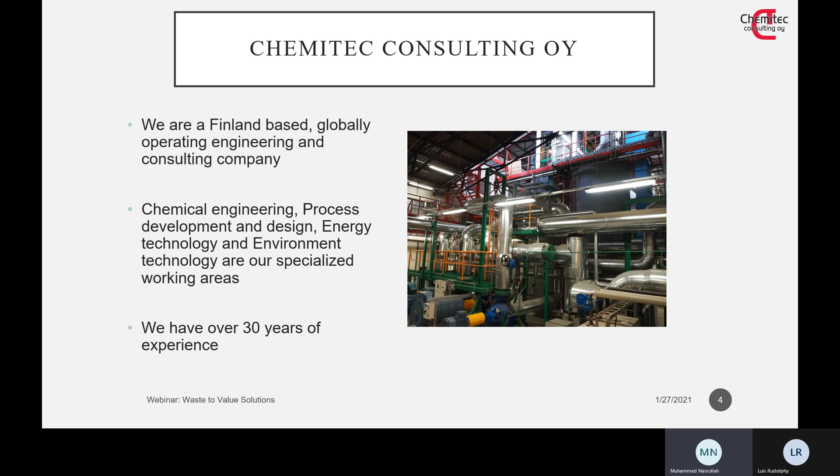We are now more than 30 years old. We have been operating in different parts of the world, and we have conducted quite many projects in Europe, and also we are active in Asia and other parts of the world. Chemitec's head office is in Espoo, Finland. We have conducted a number of projects in chemicals related to chemical engineering, process development and design, and in energy, including waste to energy.

These are waste to value related expertise and services Chemitec has been working on and offering to our customers and clients in different parts of the world: starting from process concept to solution development, technology assessment for best available technology route, project scoping and baseline study, detailed techno-economics, project costing, pre-feasibility study, feasibility study including basic design and pre-engineering. We are also involved in arranging technology for waste to value and waste to energy solutions. We are partners of top waste to energy technology supplying companies in Finland, and we also do project management in this area.

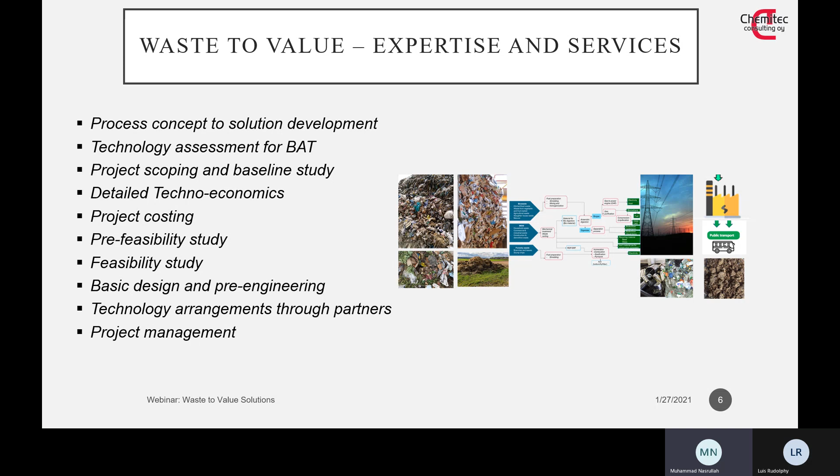Here is a list of projects we have worked on quite recently in waste to value and waste to energy related projects. We prepared a pre-feasibility study delivered to our client in Mymensingh, Bangladesh, for about a 5.5 megawatt electricity production waste to energy plant. Then we also prepared and delivered a pre-feasibility study for a 23 megawatt electricity production waste to energy plant in Colombo, Sri Lanka.

And we have prepared a number of project proposals for different cases in Pakistan, including waste to energy plant proposals in Karachi, Lahore, Islamabad, and Faisalabad. Very recently we have signed an agreement with a client in Bangladesh, and we will start working to deliver a bankable feasibility and pre-engineering study for a 6 megawatt waste to energy plant in Savar, Bangladesh.

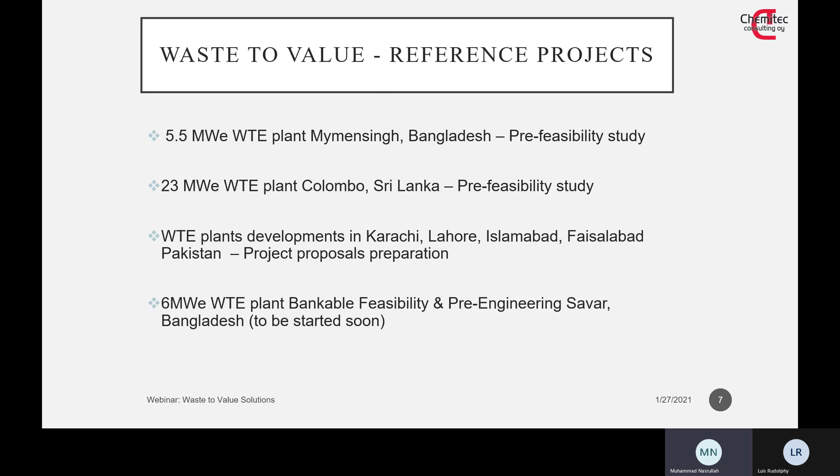Right, so now we come to our main topic, which is about the issue of waste management. As I mentioned earlier, why do we need to worry about waste management? What are those things which are already getting alarming in this sector?

So this study is basically conducted by World Bank Group about a global snapshot of solid waste management to 2050, in which they have presented region-wise the waste generation in the world.

So here if we see the top 3 regions producing more waste than others: first is East Asia and the Pacific, Europe and Central Asia, and South Asia, generating 468 million tons, 392 million tons, and 334 million tons respectively. And then there are other regions, North America, Latin America, and the Caribbean, and so on.

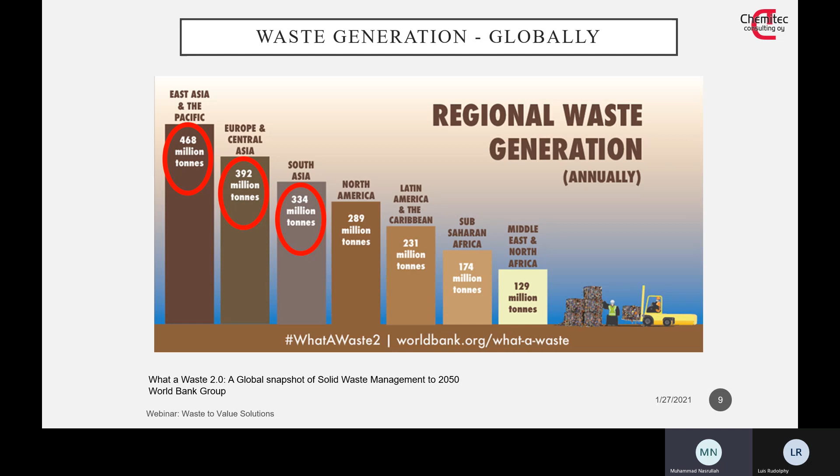Right, so it's important to know how those regions are treating their waste, how they are handling the waste generated there. Looking at South Asia, 75% of the waste generated ends up in open dumps. Those are not even proper landfills or managed landfills, but just open dumps, somewhere outside the city, where waste is transferred and placed in open areas.

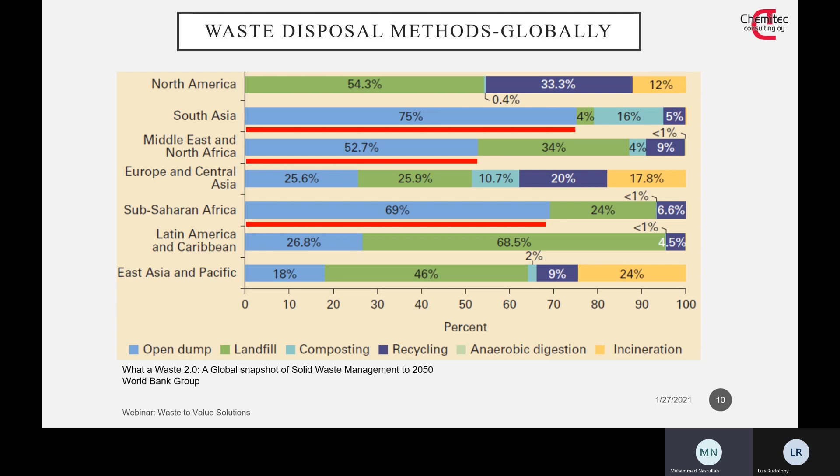Similarly, in Middle East and North Africa, 52.7% of the generated waste ends up in open dumps. And in Sub-Saharan Africa, around 70% of generated waste ends up in open dumps. In those regions, very little waste goes to proper landfills, and even less is utilized for value recovery in terms of composting, recycling, or incineration.

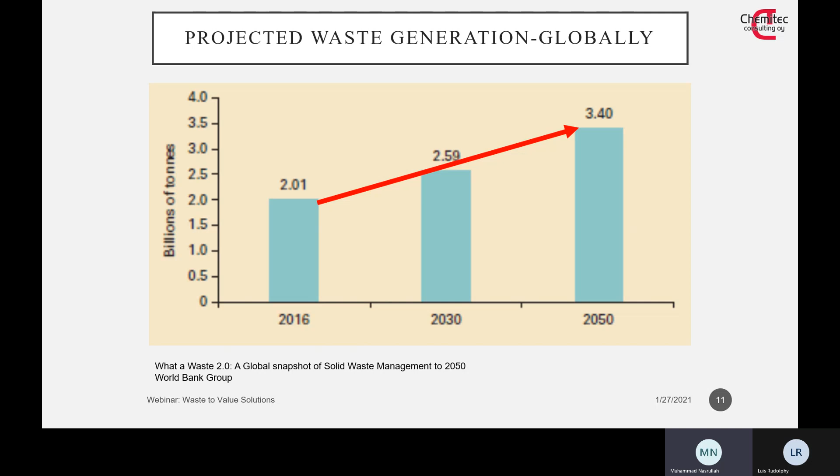This slide shows the generated and projected waste amount in the world. In 2016, it was around 2 billion tons, and it is projected to be 3.4 billion tons by 2050. So the trend is increasing, as countries are developing fast, more urbanization is taking place, and the lifestyle of people is changing, so the amount of waste is also increasing.

Talking about Southeast Asian countries, here are some prominent countries in that region regarding waste to energy and waste to value related sectors. In Vietnam, annual waste generation is a little more than 20 million tons, around 22 million tons. Thailand generates around 25 million tons, and Indonesia is the highest waste generating country in the Southeast Asian region, more than 60 million tons per year.

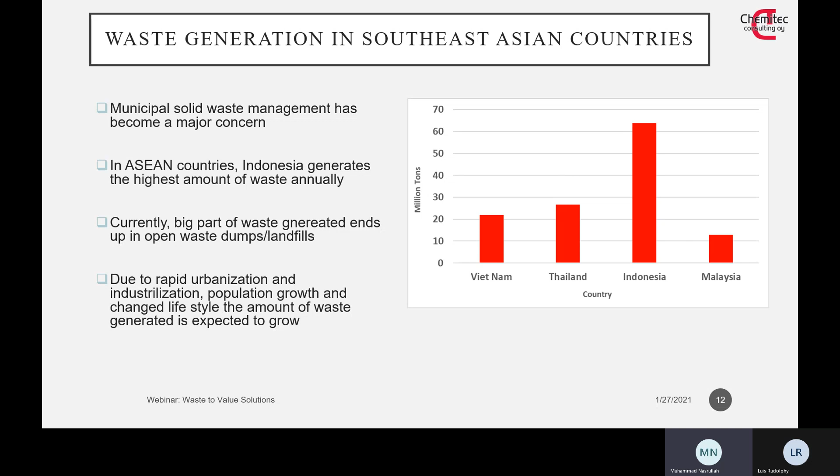So basically, the message here is that there are two main fractions in this waste which contain value and which can be recovered quite significantly. First is the organic waste, food waste, and second is the combustible fraction, including paper, cardboard, plastic, textile, etc.

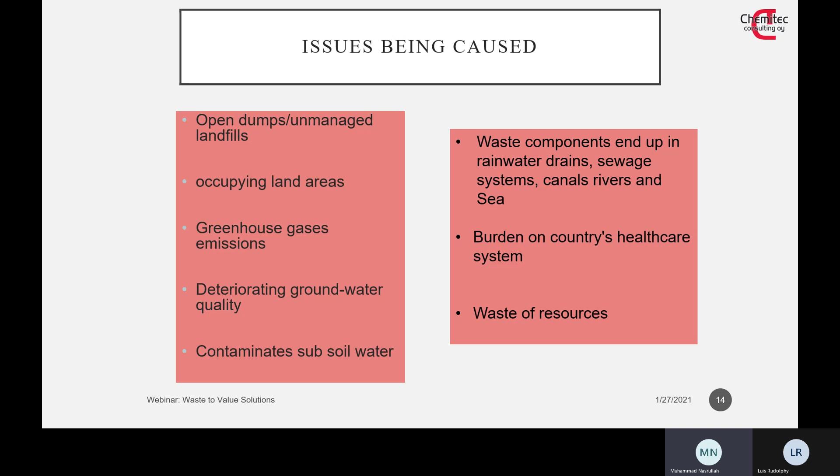Now we will go through waste to value solutions Chemitec has developed and offered to customers in Europe and Asia to tackle waste management issues by recovering maximum possible value out of the waste.

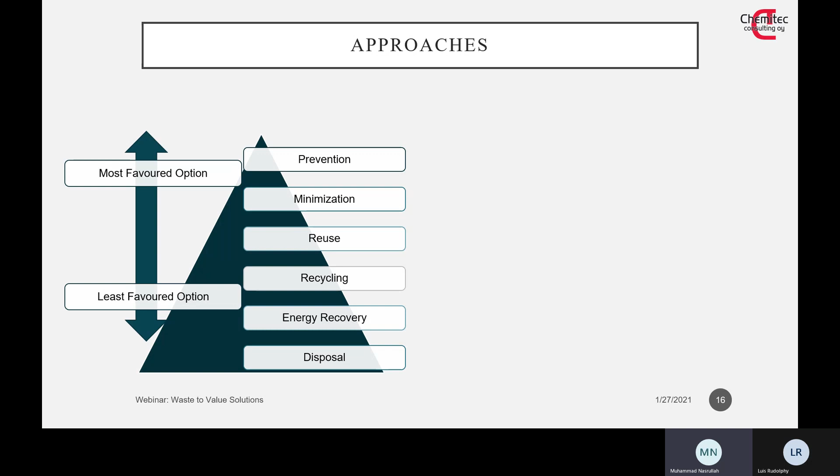These are the approaches which are quite strictly followed, especially in Scandinavia and European countries. The first approach is about following the guidelines of the waste hierarchy, starting from prevention, minimization, reuse, recycling, energy recovery, and disposal, where the upper parameters are most favored and the lower parameters are least favored. The second is about the shift from linear economy to circular economy.

In the linear economy case, basically raw materials are taken from nature, used for manufacturing, and the products are used and thrown away. Then again, raw materials are taken from nature. So in this way, the raw materials comparatively fast deplete.

But in the circular economy approach, the products produced are not thrown away directly, but the still available value is recovered out of those products, which is recycled back into this loop.

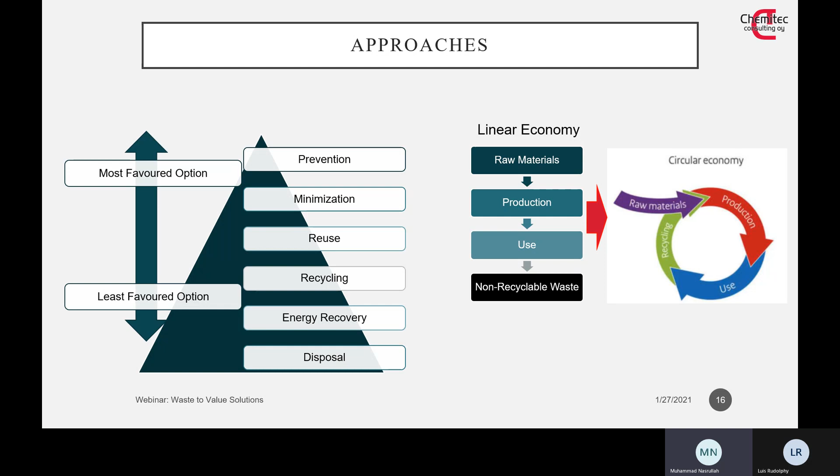So here's the first solution, which is very important in addressing the waste management issue in the long run, and that is about education and awareness to society. It's about educating society on what is waste, what does it contain, prevention, minimization, reuse, recycle, value recovery, and proper disposal.

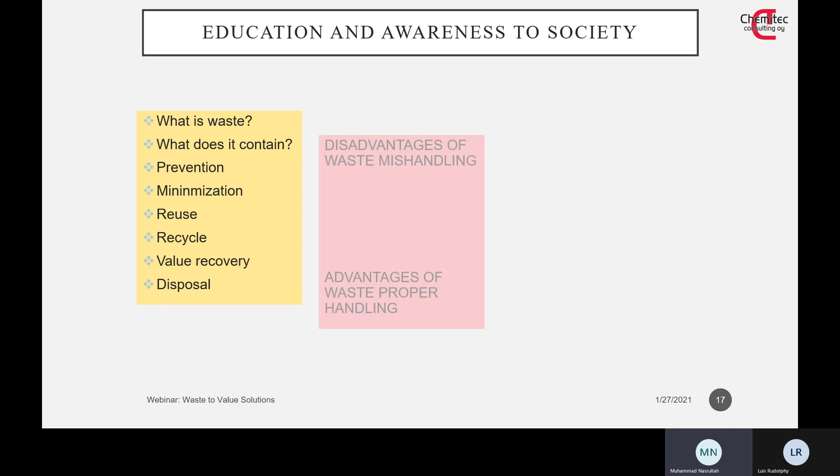And then explaining to them the disadvantages of waste mishandling, that if waste is not managed properly, what kind of issues it will create for the society, for the city, for the country, and for the world. On the other hand, if the waste is managed and handled properly, what kind of benefits we can have from this proper management.

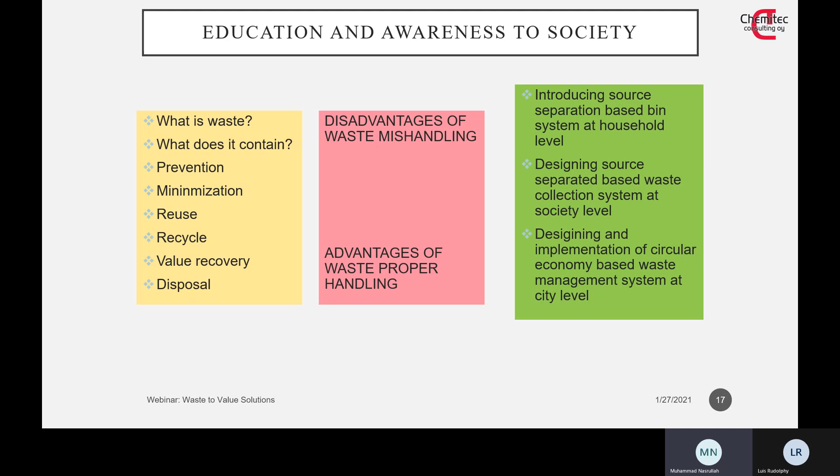At the same time, some practical steps include introducing a source separation based bin system at the household level, designing a source separated based waste collection system at the society level, and designing and implementation of a circular economy based waste management system at the city level. Chemitec Consulting has been working in this area as well, supporting and assisting organizations or educational entities in preparing material, systems and processes for them to educate and raise awareness in society about waste management issues.

Now we will discuss the technology part of the waste to value solutions I mentioned. In this technology part, we will give a case study based on various assignments and projects we have conducted so far, especially in the Asia region.

These techno-economic and environmental aspects of waste to value solutions are based on those case studies, so the numbers may vary for your specific case. It might be due to the quality of waste being different, or the amount of waste available being different. However, the numbers may still be comparable.

So we will also discuss the capex and opex values for those specific assignments and projects Chemitec has already worked on. The first solution is about a circular economy based waste to value system.

In this case, we have municipal solid waste, non-recyclable mixed waste, which is collected from households, commercial areas or other places, and which mainly ends up in the landfill.

At the first stage, this municipal solid waste, mixed waste, is processed in a mechanical treatment-based waste sorting plant. Depending on the composition and nature of the input waste, there may be different unit operations used in the mechanical treatment plant: bag opener, material cutter, shredder, screening, ferrous metal separation, non-ferrous metal separation, and also an air classifier to take away the combustible lightweight waste components.

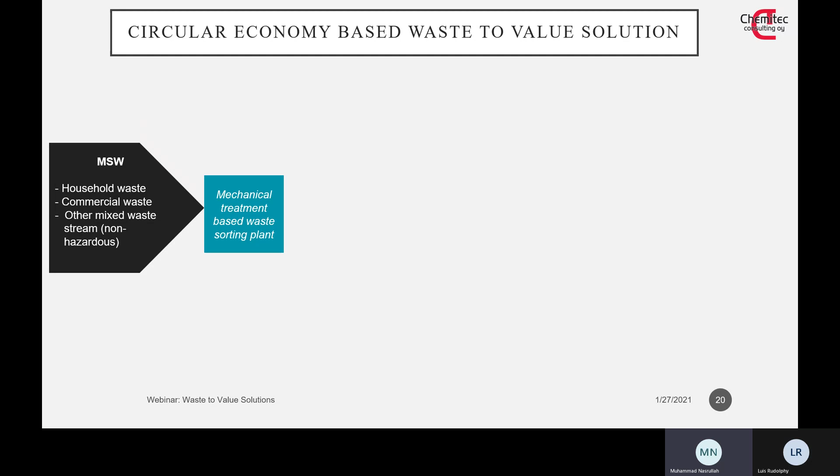In some cases, there might be a need for near infrared sorting units as well, because in certain cases the input waste contains components with high chlorine value, and we need to take it out from the waste so it doesn't end up in the refuse derived fuel.

So after the mechanical treatment process, the input waste is segregated into different source streams. The first one is biomaterial. Then if there are some recyclables in terms of metal or glass or others, then RDF, refuse derived fuel - in some cases it is solid recovered fuel with better quality. The third and fourth stream is inert.

We have observed that mainly in the South Asia region, there might be a significant fraction of inert in the form of dust, soil, mud, concrete, etc.

After the mixed waste is segregated into these different streams, each stream is further processed in its respective system. The biomaterial is processed in a biogas production plant, producing electricity from biogas through a CHP unit, combined heat and power unit. The digestate which comes out from the bioreactors passes through separation and drying technology, and biofertilizer is recovered from this digestate.

If we talk about the refuse derived fuel, RDF stream, it is incinerated in a combustion plant, producing electricity and residues - ash, bottom ash, fly and filter ash. The inert contains a certain part which can be used as construction material, and the inert processing is done for that material. Also some amount of inert goes for landfill material.

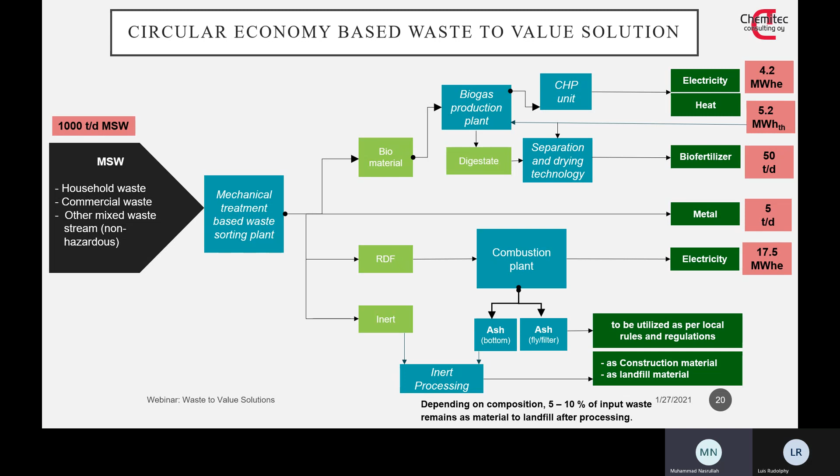There is 50 tons per day of biofertilizer, 5 tons per day metal, and 17.5 megawatt hour electricity produced from the combustion plant section. Depending upon the composition of input waste, there can be 5 to 10% of input waste that remains as material to landfill after processing.

There is a second solution. It comprises a waste-to-energy based waste-to-value solution. So in some cases, if the customer is not interested to have an anaerobic digestion facility as part of their solution, and is interested to incinerate most of the waste...

In that case, the biomaterial is not segregated as a separate stream, but from mixed waste, metals are recovered, or glass if there is some glass as well. Also the inert material is segregated, and then most of the material is transformed into RDF form.

This RDF is incinerated in the combustion plant, producing electricity and heat, and there is residue in the form of ash. Again, inert material partly can be used as construction material, and partly it is sent to landfill. The ash, depending upon local rules and regulations, is utilized.

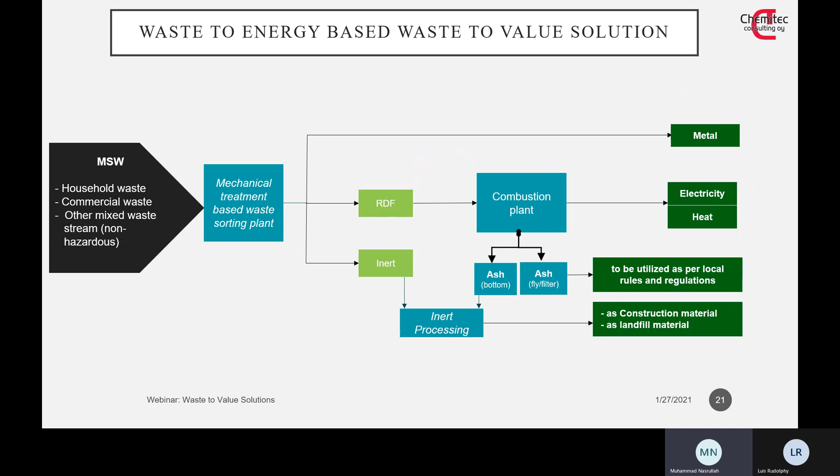In some cases it may be used as construction material, but in some cases it may not be used as construction material, so it is properly disposed. As I mentioned earlier, there might be 5 to 10% of input waste that remains as material to landfill after processing.

An additional step in this process is that the input waste might be wet, containing moisture content of 50% or 55%. So here it would be required to evaporate water to dry this material, in order to have a calorific value of RDF suitable for the combustion plant, which is a minimum of about 8 megajoules per kilogram. This heat is utilized to dry the input waste to increase the calorific value of RDF.

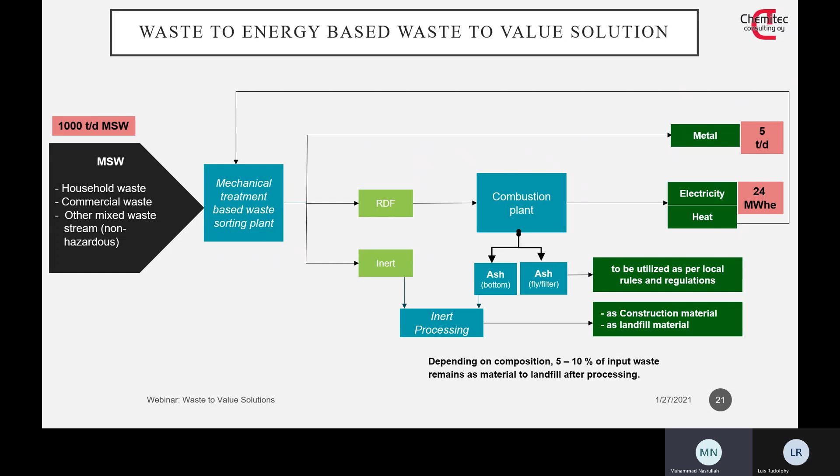So here, if we treat 1,000 tons per day of MSW, it generates 5 tons per day of metal, and then 24 megawatt hour electricity from the combustion plant. So basically, using only combustion and not using an anaerobic digestion plant may increase the electrical output by 5 to 10%.

Then there is a second major stream of waste, especially if we talk about the Asia region. It is bio waste, which may contain agricultural waste, manure, slaughterhouse waste, wastewater sludge, and it is now source-separated bio waste. It is not mixed with other components.

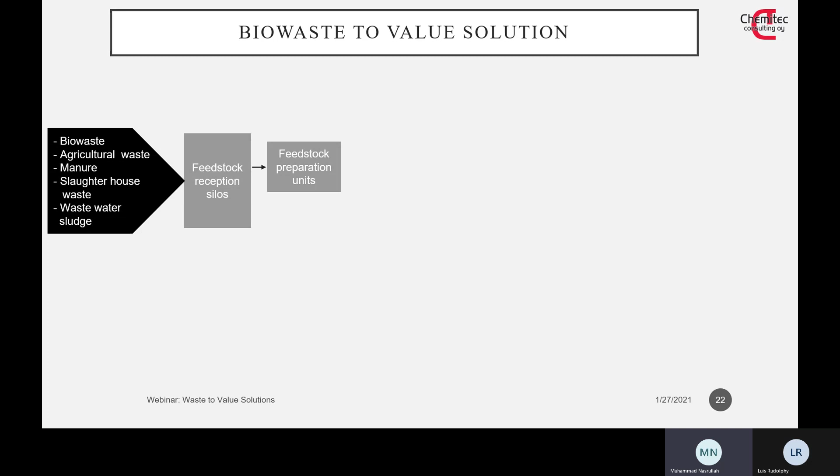In this case, it doesn't require treatment in a mechanical treatment plant, but straightforward, it is sent to feedstock reception silos and then feedstock preparation units. It might require some shredding, mixing with water if needed, and then it is a ready-made feedstock for the anaerobic digestion system, from where biogas electricity can be produced.

Or if the customer is interested, it can be transformed into biomethane, which is an industrial fuel replacing natural gas, and it can also be used to produce compressed natural gas or liquefied natural gas as fuel for public transport.

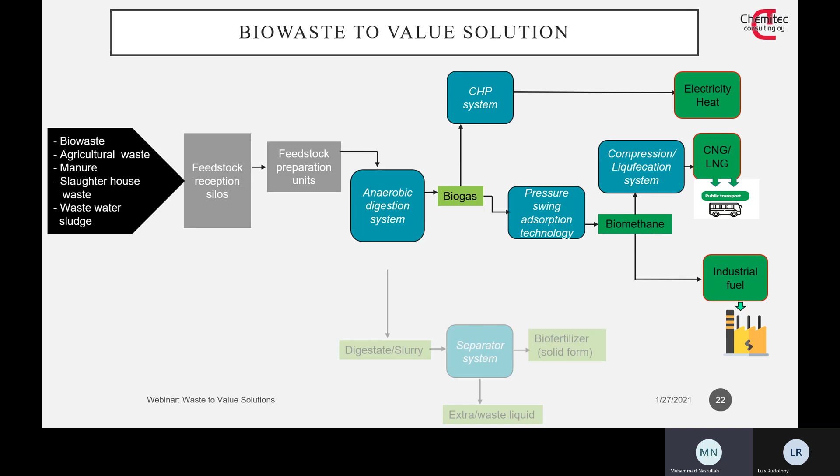And as mentioned earlier, the digestate coming out from anaerobic digestion passes through a separator system technology, producing biofertilizer.

Here, if we process 500 tons per day of source-separated bio waste, kitchen waste, it can produce 9.5 megawatt hour electricity and also thermal heat, which can be utilized in the biogas production plant and also in the biofertilizer separation setup. Or it can produce 52,000 normal cubic meters per day of CNG or LNG, or around 52,500 normal cubic meters per day of biomethane, or a mix of these products depending upon the client's need and requirement.

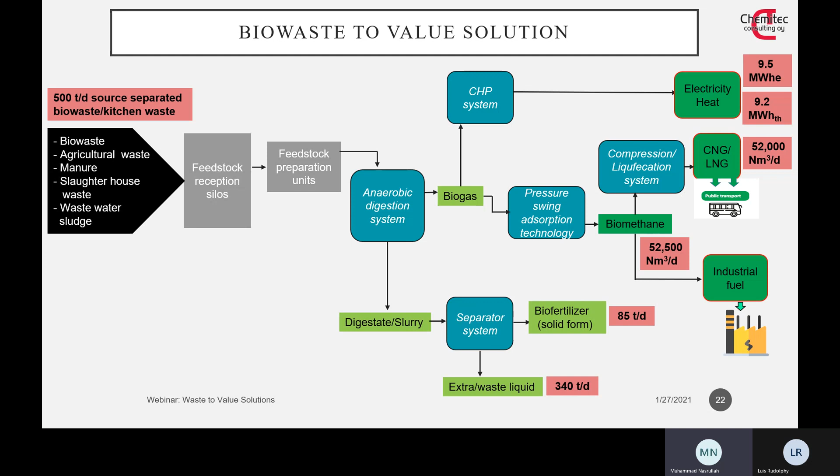Here is one process which Chemitec has recently developed, and we offered this process also to one customer in Sri Lanka. It is about clearing old open dump sites and unmanaged landfills of waste material.

Basically, the concept is developed to clear land area which has been covered by waste material for many years. For instance, in some cases, the open dumps might be operating for the last 20, 25, 30 years, or even more. This occupies a significant amount of land area, possibly hundreds of acres.

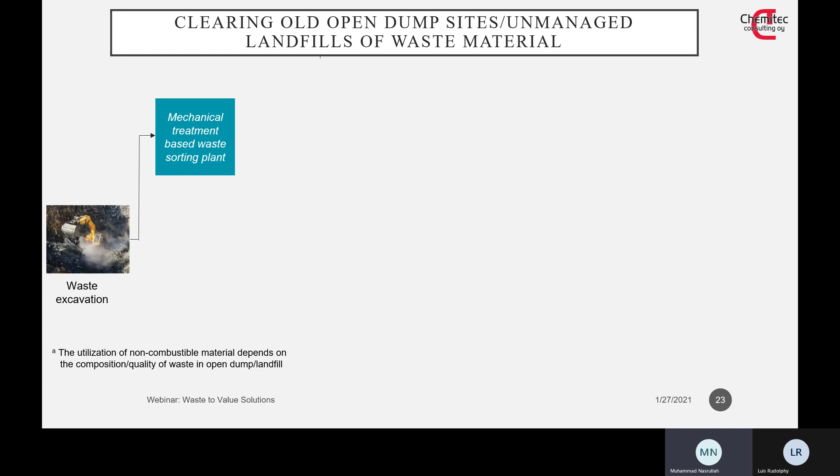So in this case, the waste is excavated from open dumps and landfill and is mechanically treated, where it is sorted into recyclables. There might be some metal which can be recovered and recycled. Then there are two main streams, because most likely in these open dumps and unmanaged landfills, which have been there for many years, the biofraction and also some paper and natural fiber-based textile most likely are degraded completely and turned into sort of soil already.

But plastics and some rubber, etc., more likely are still there, so this combustible fraction containing plastic and rubber can be recovered. The second major stream is this non-combustible material. The combustible fraction can be transformed into RDF, which is a very good fuel for waste-to-energy plants containing good calorific value, producing electricity and heat.

Then this non-combustible material, which is inert, is processed in the post-sorting processing system, where heat produced from the waste-to-energy plant is utilized to process this type of material. This heat helps remove some toxic elements or bacteria which make this material of no use. But after processing, a certain part of this material can be used as construction material for specific applications, and the rest is material for sanitary landfill.

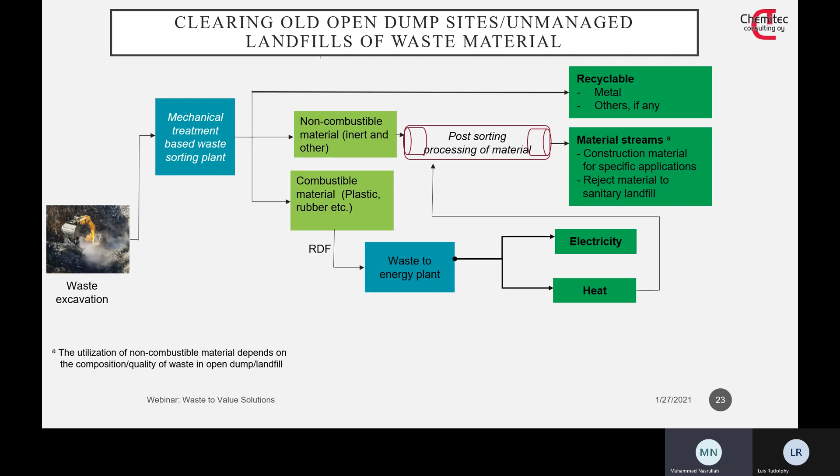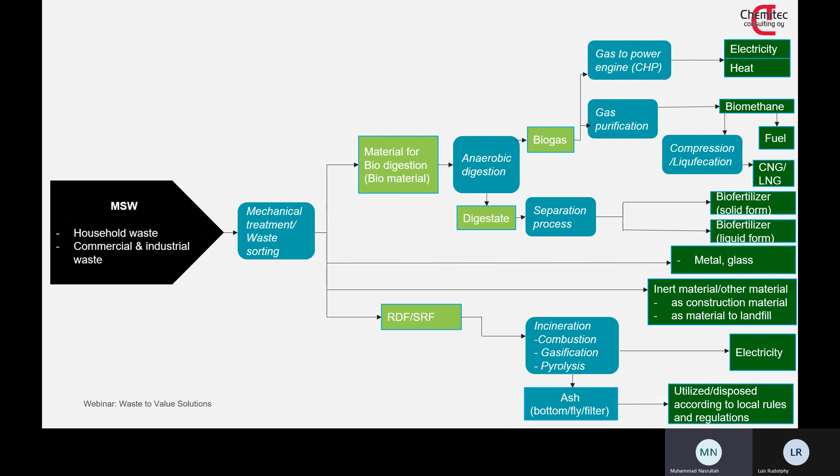So this is the summary of the solutions I have described so far. First is MSW, as I mentioned, treating it in a mechanical treatment plant, and then segregating it into different resource streams, each processed accordingly in further steps, recovering maximum possible value. The second stream is bio-waste, source-segregated bio-waste, which can be directly used in an anaerobic digestion plant.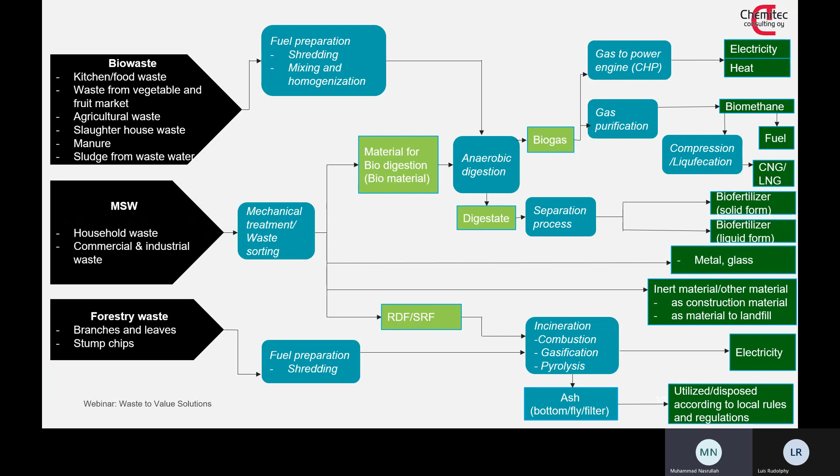So this was the technology part. Now we will go through the economical part of these solutions. And when we talk about the economical part, what comes to mind is CapEx, OpEx, and revenue generating streams.

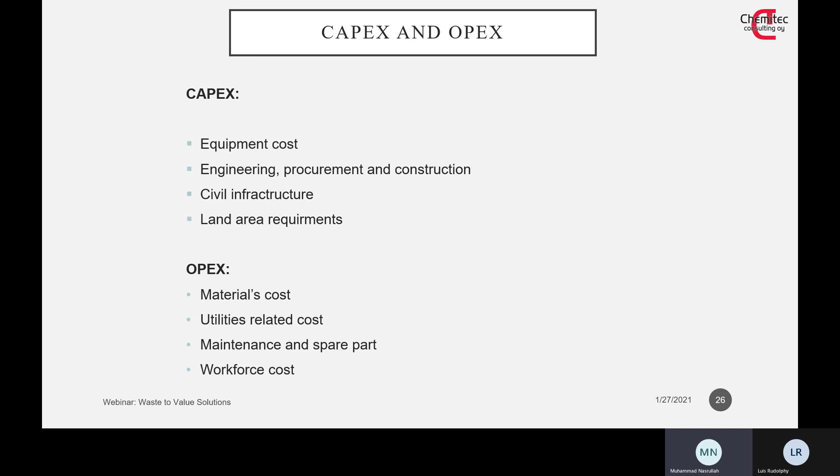CapEx mainly includes equipment cost, engineering, procurement and construction, civil infrastructure, and land area requirements. These are the major sections included in CapEx, and OpEx includes materials cost, utilities-related cost, maintenance and spare parts, and workforce cost.

So estimated CapEx for those specific projects or assignments we have worked with — the estimated CapEx does not include civil works like building construction and infrastructure-related activities and cost of land required as plant site.

If we talk about biological treatment from source-separated bio-waste, the estimated CapEx for this system is 3 to 4 million euros per megawatt electricity production. If it is mixed waste processed through mechanical biological treatment, the estimated CapEx rises to 3.5 to 4.8 million euros per megawatt electricity production. And if we integrate it with a combustion plant as well, making it mechanical, biological, and combustion treatment of municipal solid waste, the CapEx value increases to 5 to 5.5 million euros per megawatt electricity production.

Just to mention again, this does not include civil work related activities like building construction and infrastructure, and cost of land required as plant site, because this may vary significantly from location to location. For instance, in Europe workforce is expensive, so it will be expensive, but in some parts like Asia it is less expensive, so the CapEx numbers would be less, in addition to those numbers.

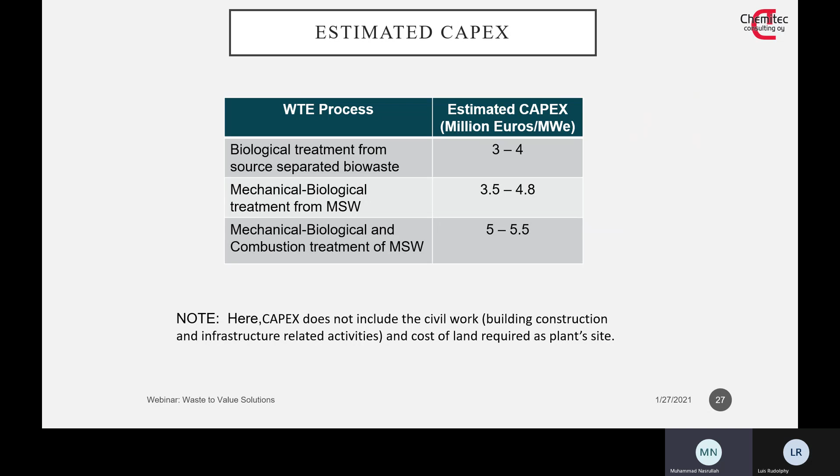Estimated OpEx: we talk about mechanical treatment of MSW — this is in case a customer is interested to produce RDF or SRF and use it for cement kiln industries or power plants, etc. Here, maintenance and spare parts cost is 1.4 euro per ton of material processed. Then there is electricity consumption, and also workforce cost would be in addition.

Then we come to biological treatment of bio-material. Maintenance and spare parts are around 1.7% of the plant's investment. In addition, there is electricity cost and other utilities, and also workforce cost — it depends case to case.

And for combustion treatment of waste, for instance in RDF, the maintenance plus spare parts plus materials, chemicals and ash handling would be around 1.5 million euro per year, and then there is electricity consumption in addition.

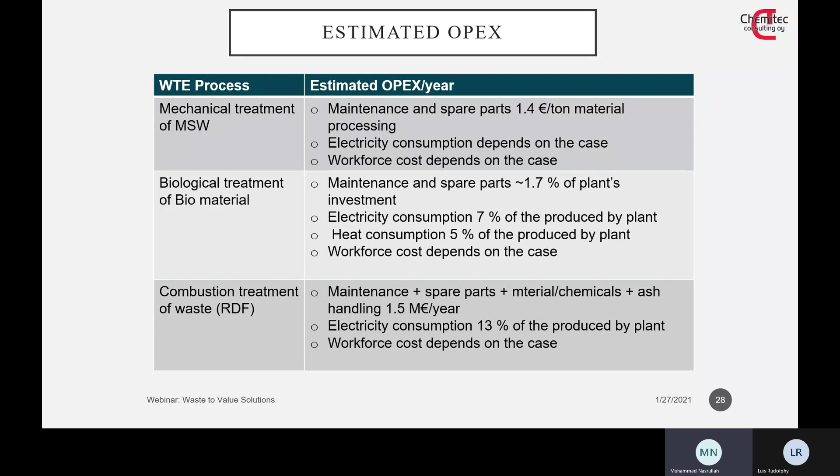That is around 13% of the produced by plant, and then workforce depends on the case to case. And as I mentioned, economics also includes the revenue generating products.

These are revenue generating streams which will be marketable after implementation of these waste to value solutions. Depending upon the requirement and needs, it might be electricity, heat, RDF, SRF, CNG, LNG, or others. And in some cases, these waste to energy plants can also be integrated with desalination plants, producing clean water for the society.

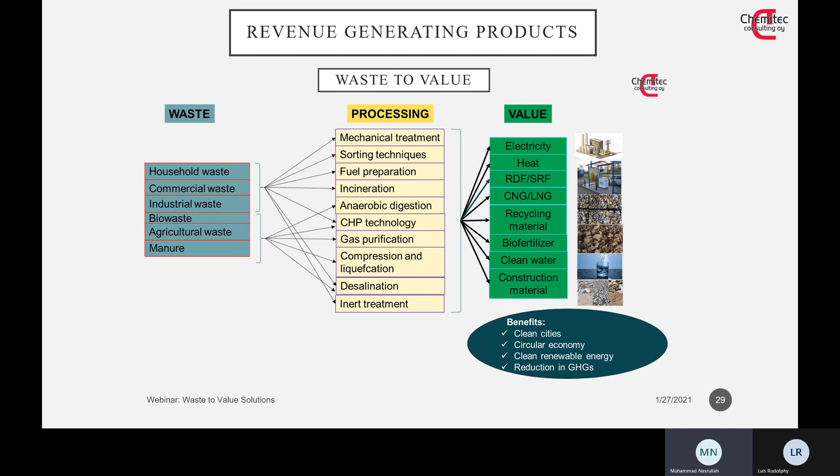In addition, the benefits are clean cities, circular economy, clean renewable energy, and reduction in greenhouse gases.

Now we come to the last part of our presentation, about the environmental aspects of waste to value solutions. As I mentioned earlier, around 5% of global greenhouse gas emissions belong to the solid waste management sector, and basically the solution would provide an answer to that.

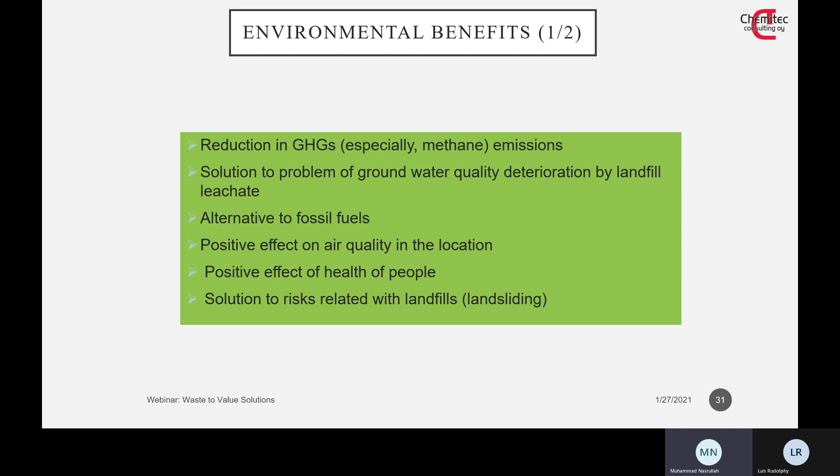This is also a solution to the problem of groundwater quality deterioration by landfill leachate, and an alternative to fossil fuels. It has a positive effect on air quality in the location, a positive effect on the health of people, and it is also a solution to risks related with landfill landsliding, because in some cases we have heard that piles of open dumps go very high, causing landsliding and harming the residents living nearby.

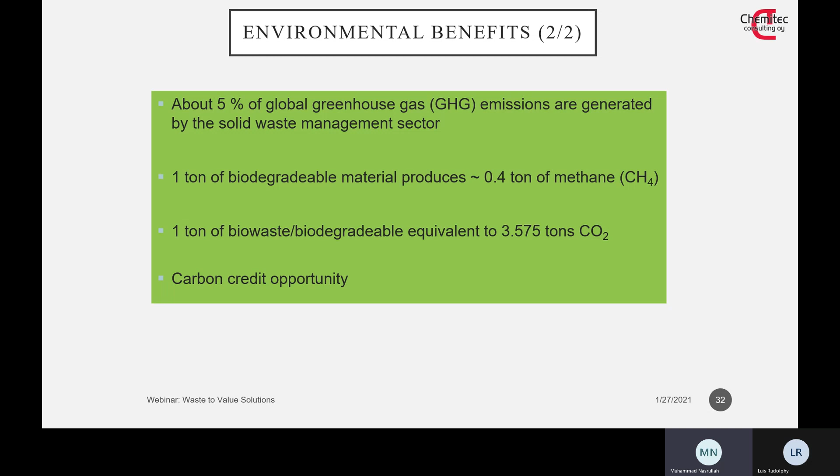In terms of carbon credit opportunity, treating 1 ton of biodegradable material produces 0.4 ton of methane, meaning that if we treat the waste, it will save 0.4 ton of methane from being directly emitted into the atmosphere, compared to if the waste is just thrown outside in open dumps and landfills. Also, 1 ton of biodegradable bio-waste is equivalent to 3.575 tons of carbon dioxide savings. So this is the carbon credit opportunity available for certain cases.

And there are social impacts, like job creation, bringing massive business activities to the country, turning waste to raw material, and also turning trash to cash, a clean and healthy society, reducing burden on the healthcare system, and improving the tourism sector as well.

Because in some capital cities, if there are open dumps or landfills in the middle of the city, this doesn't give a good impression for tourists. So basically, it will clean the cities and improve tourism related activities as well.

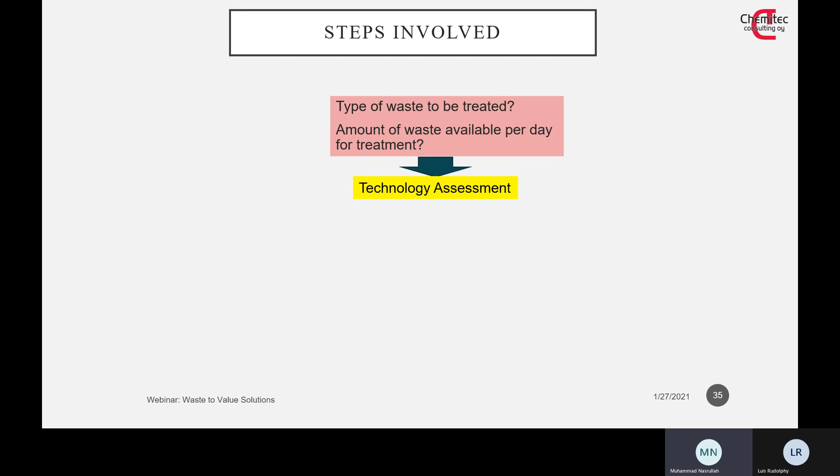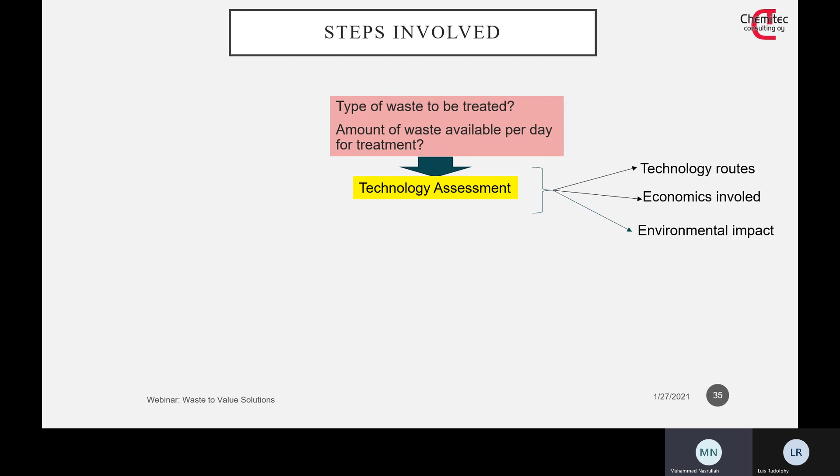Finally, here is the working roadmap of how Chemitec works on waste to value related solutions for our clients and customers. We need to know what type of waste is to be treated and the amount of waste available per day. We do technology assessment based on our in-house built software and tools, in terms of choosing the best technology route, economics involved, and environmental impact, then move forward towards pre-feasibility study, feasibility study, and basic design and pre-engineering of the plant.

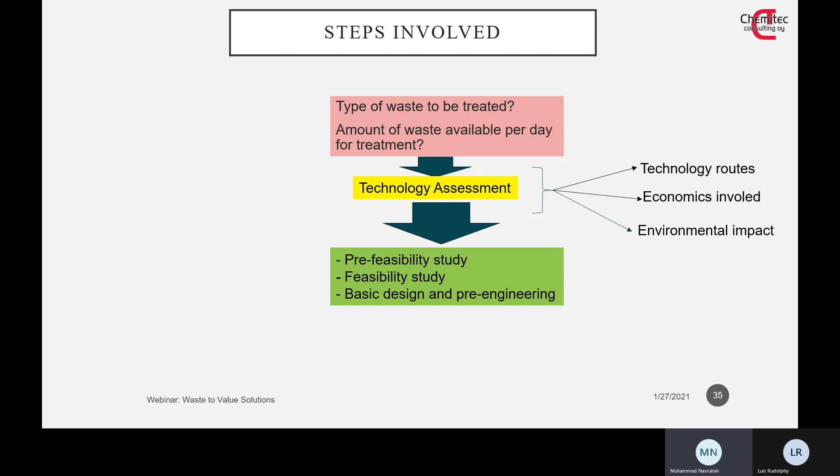Basically, what we do is prepare and present different options to the customer, and then recommend what suits their needs best. They can choose one of them, and the chosen route is further proceeded with for feasibility study, pre-engineering and design. At this stage, all technology supplying stakeholders are also on board with us.

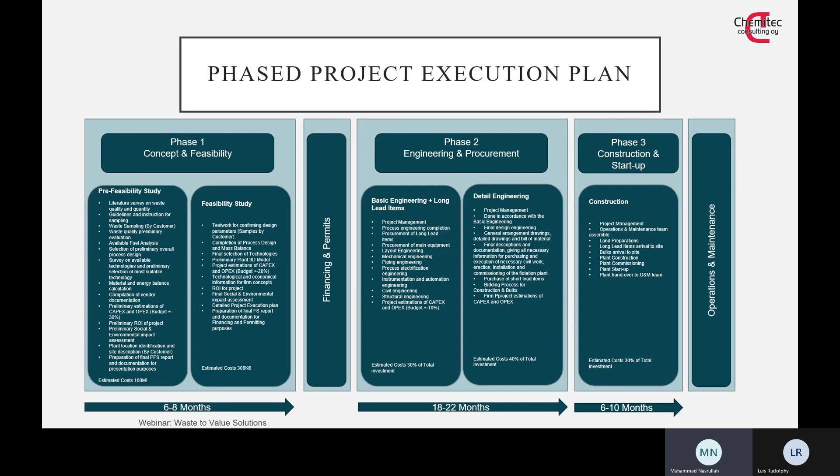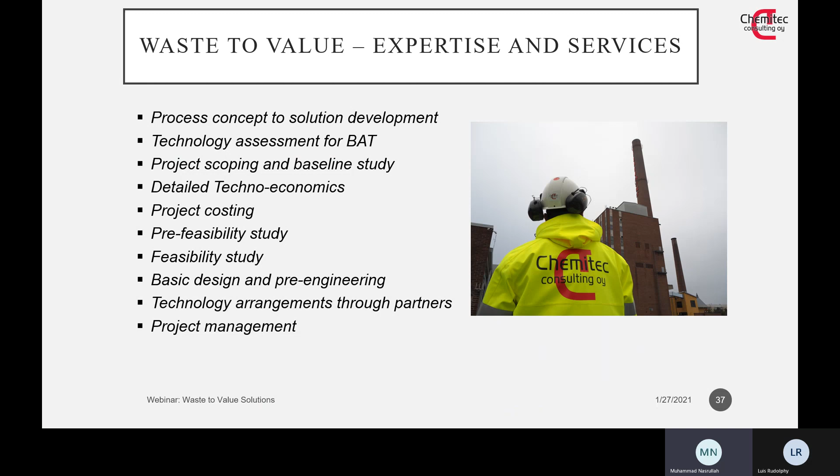So we are open and available to discuss your specific cases in detail in separate meetings, sharing our experience of techno-economics, possible business models, and roadmaps about your waste to value energy cases. We can share what type of solution will be most suitable for you, what business models can be involved, what technology routes are there as options, and what economics are involved. As Luis mentioned earlier, after the presentation there will be a question and answer and discussion session. Thank you very much for listening to the presentation.

Now please feel free to ask a question or comment if you have any, or if you want to share your experience of waste to energy cases and what type of solutions you are interested in. Yes, thank you.